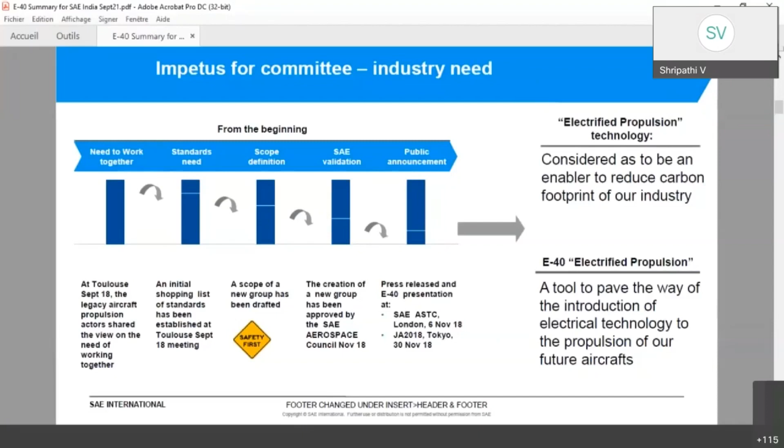Then, another point that is very important for me is the representation of the industry. So which industry is represented by the production of our standards? So we just saw that - large population, large industry. The second aspect is to be able to be legitimate when we produce standard.

We need to demonstrate that we have the skill on board on the group in order to produce, to establish the appropriate standard, so the acceptable mean of conformity, the standards that will be able to be eligible for the authority to declare them as acceptable mean of conformity.

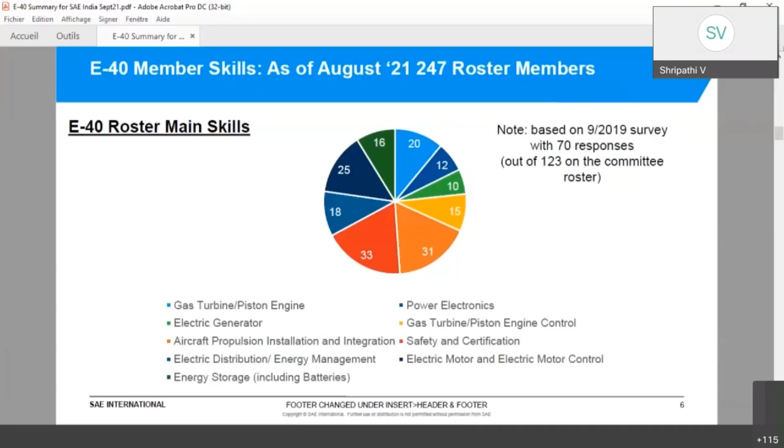So you will have the slide available, so you will be able to go in detail on it. So I will not go more in detail.

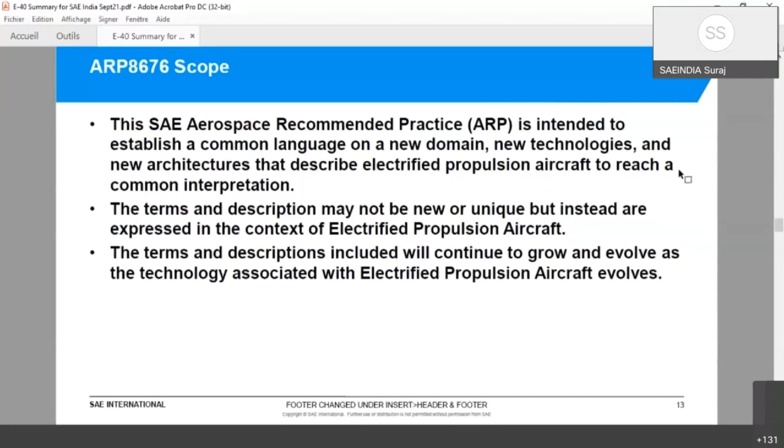In terms of status, we started the first ballot in June. The number of comments was on the order of 100. We first circulated the document in our committee and collected 300 comments. We addressed all 300 comments, updated the document, launched the ballot, and then collected about 100 comments, which we addressed by this summer.

My objective is to launch the second ballot for publication in the coming days. As I said, these documents will be updated as soon as we need to.

The second document, the one I just referred to, is closely related to 76, and we really intend to publish both documents at the same time, within a few weeks of each other.

This document is clearly an AIR, because it's not the role of our organization to recommend an architecture. It's the responsibility of each type certificate owner or company to define the best architecture for their product. So clearly not an ARP. But it was very interesting for us to describe a set of various architectures.

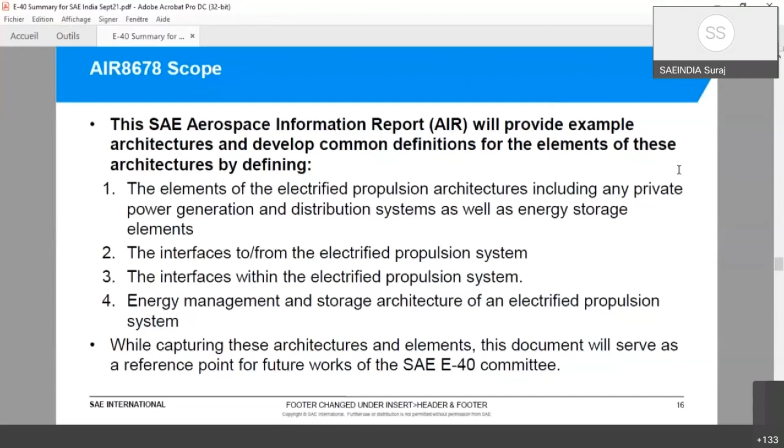In terms of development plan, a first ballot was launched in July, rejected by only one person, me, because it was clear we needed to synchronize and refine the coordination between terms. So there are very few modifications needed on both sides, 78 and 76.

I'm convinced we'll be able to launch the second ballot in the coming days in order to synchronize the publication of both documents, architecture and definition, in the same time frame, to make them available at the same time.

77, safety assessment for electrified propulsion. At the very beginning of the story, the first day that we discussed all together, it was clear that with the introduction of new architecture and new technology, the way we establish the safety dossier to demonstrate that the engine will meet the requirements.

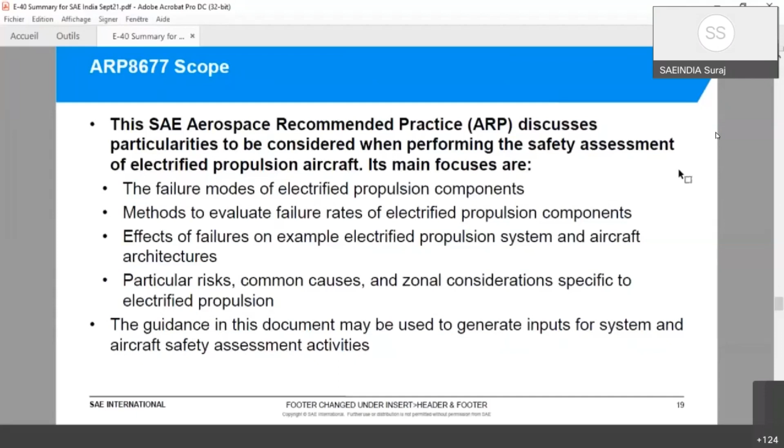In terms of schedule, it's a very complex and very ambitious document. Today, the status is to produce a draft by the end of this year, to have a first pre-ballot review at the beginning of next year, in order to be able to launch a ballot next year. It's an ambitious plan. We will see if we adhere to this.

During the activities on 7.7, it was clear that there is a topic that is important for the industry. When I say important in terms of schedule, meaning that we need it in the coming months, it's all the activities done to demonstrate compliance of the engine to endurance certification requirements. At the beginning, before we launched these new documents, our objective was to address this topic in the 77 documents.

But it was clear that the 77 documents will not be published rapidly. So then it was decided to remove this subject from the scope of 77, and we launched a specific document to address this. This document is ARP 8689. The name is Endurance Test for Aircraft Electrical Engine.

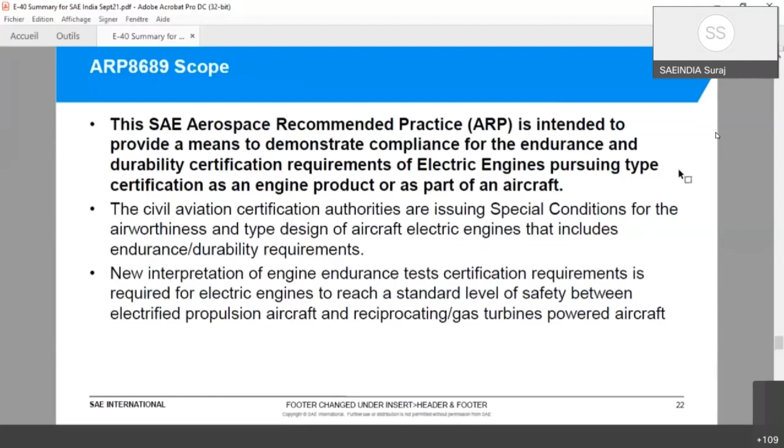With an impressive schedule, our objective is really to have a robust draft of the documents this year in order to initiate a first circulation for comments this year, in order to launch our ballot beginning of next year, in order to publish the documents next year. So it's a challenging schedule, but I'm very confident thanks to the adherence of this schedule and the engagement of people we have, and the skill. It's true for all the other groups, but I am personally impressed by this group.

So, in terms of the life of the group, our plan is, as I told you, this has been recorded, and when you hear me, I will be animating our September meeting. Our next planned face-to-face meeting...

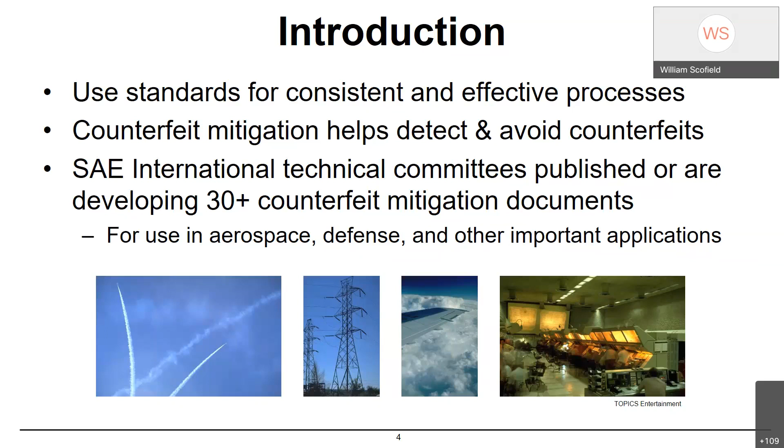So I think we kind of talked about this a little bit. The three main technical committees are the G19, G19A, and G21. Each committee has multiple documents. Per SAE rules, all committees are voluntary - you're volunteering your time. We have a lot of participation from not just industry, but also government and academia, so we get a broad swath of opinions and visions. They're all consensus standards, and we get together on a regular basis also to exchange information about where we see the counterfeit threat coming from and various ways to mitigate it.

In the G19 committee, we focus on EEE components. Jim Kryman - it's his turn to be chairman of this committee. He's doing an excellent job. As a matter of fact, I borrowed these charts from Jim. He presented them earlier at a CALCE conference back in Washington, D.C. earlier this year.

We kind of break it up into three key areas that we focus on. We have the franchise distributors - those are the distributors that are authorized by the manufacturers of the parts. Arrow and Avnet are a couple of the biggest ones, at least here in the States. We have a standard that we've written for them, AS 6496, and it has details - I think it's primarily focused on traceability and ensuring that the parts work as they work through the distribution chain, are segregated and maintained.

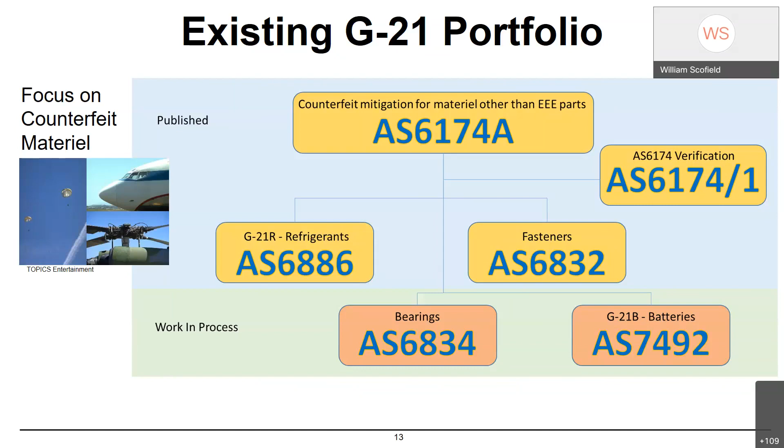Next. This covers everything other than EEE parts. It was first published about 7 years ago in 2014. This document - this committee took a little different approach than we did in 5553. It's 38 pages long, but 26 of those pages are guidance. Where in 5553 we pulled all the guidance out of the requirements document and put it into an ARP, this committee chose to leave all their guidance in the form of appendices in their base standard. It's 2 different ways of dealing with the same issue.

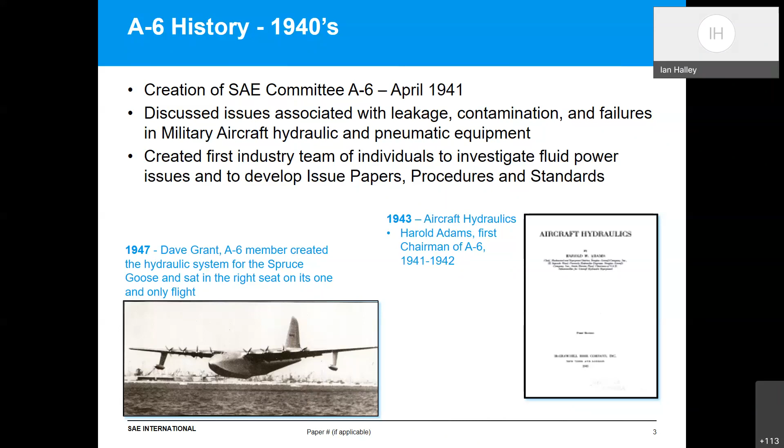The 1950s saw the increase of hydraulic system pressures from around 1,500 to 3,000 psi. They also developed the MIL-H-5606 fluid, and there was standardization of O-rings and squeeze levels, in addition to increased temperature range, filtration classifications, and levels being defined. A6 was also rescoped to include missile hydraulic and pneumatic systems.

Also of note, one of our longtime contributors, George Keller, published Aircraft Hydraulic Design, which some of you may have in your libraries, and I go to that one occasionally myself.

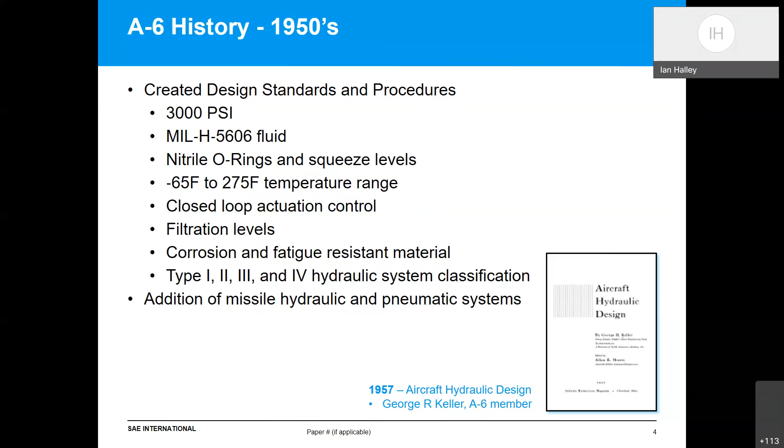In the 1960s, we started to get into variable delivery hydraulic pump development, specification, storage considerations for missiles, thrust vectoring, and then there was another restructure of the A6 committee to emphasize new technologies, including electromechanical actuation, fly-by-wire hydraulic or actuation systems, and fluidics and non-moving hydraulic components. We added marine and underwater applications and also started to look into commercial aircraft hydraulic systems.

Also of note, our longtime chairman, Bob Teree, served for a quarter of a century at this time. He's our longest running chairman and probably will be the longest ever, so we try to limit terms to about 3 years now. But he served for a total of 27 years as our chairman.

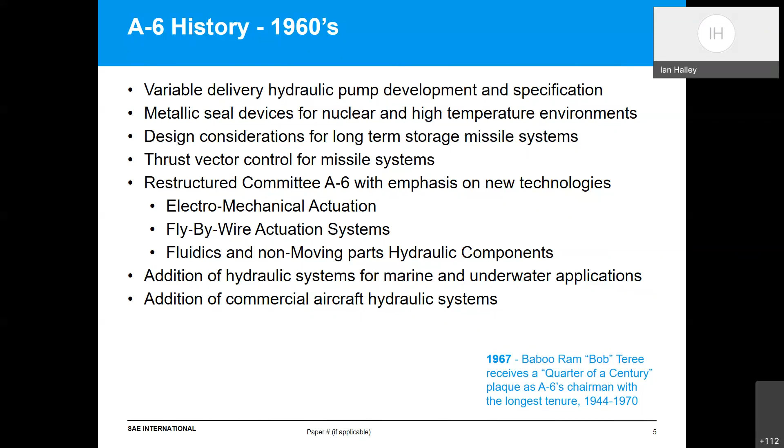The 70s saw development of the phosphate ester fluid specification for commercial aircraft. There was a lot of work with integrated actuator packages and additional hydraulic specifications for military aircraft. The U.S. Navy kicked off a study to evaluate different system pressures, focusing on 8,000 PSI. We also started to focus on flight control actuation redundancy, commercial aircraft system, and aircraft hydraulic system problems, and we aligned better with the ISO organization.

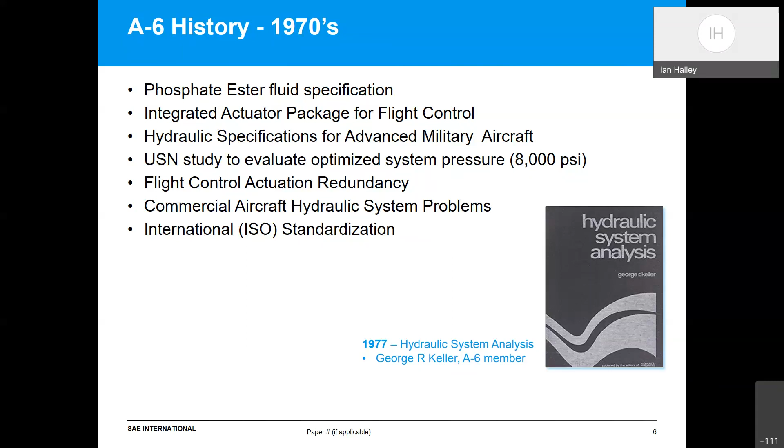Again, our longtime member George Keller published Hydraulic System Analysis, which I think is still used by quite a few engineers.

1980 saw a move to direct drive servo valves in military hydraulic actuation applications. There was a lot of work with 8,000 PSI that continued in non-flammable fluid development, and work and emphasis on lightweight hydraulic system design concepts. A6 started a lessons learned symposium, which we've continued through to this time.

A lot of the research and development on the 8,000 PSI and the lightweight or non-flammable hydraulic fluid was done by some of our members and their teams. Ed Binns, Ed Snyder and Neil Pierce were the people really leading that development at the time.

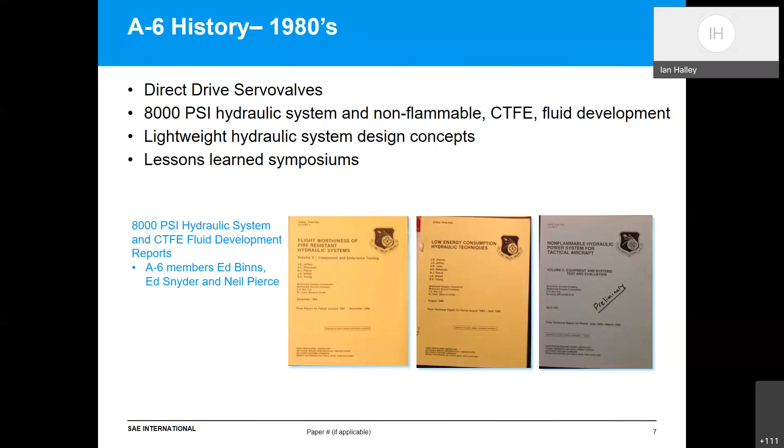So the 1990s, we had a lot of military specs that were transferred to SAE for maintenance, so we took those in. There was a big focus on seal leakage prevention, electrohydrostatic actuators started to pick up speed, and we also did some consulting with government agencies.

One of our past chairmen, Curt Chenoweth, published Flight Control Actuation, some of you may have seen. And another longtime contributor, Vernon Schmitt, published a book called Fly by Wire. So a lot of books being written by members of our committee.

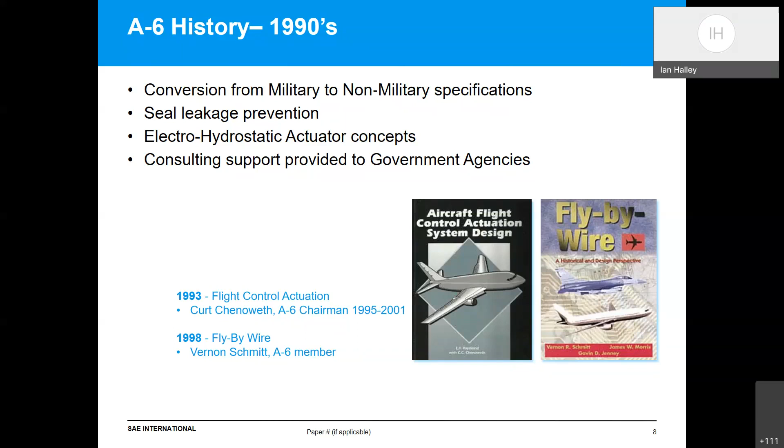So the 2000s, we started to have more emphasis on unmanned aircraft and the actuation for those aircraft, and an increase in more electric aircraft. Again, more development in electrohydrostatic actuator and electromechanical actuator documents. We also started to develop standards for pilot interfaces, such as active sticks and passive sticks and pedals.

We really committed to SAE globalization, and we held our first meeting outside of North America in Toulouse, France during the 2000s. Members of note: our second longest serving chairman, Luther Smith, was awarded the Congressional Gold Medal. Luther was a World War II hero and was a pilot with the Tuskegee Airmen. I had the pleasure of meeting him. He was a very sharp individual and sat in our meetings and provided a lot of insight into his areas of expertise.

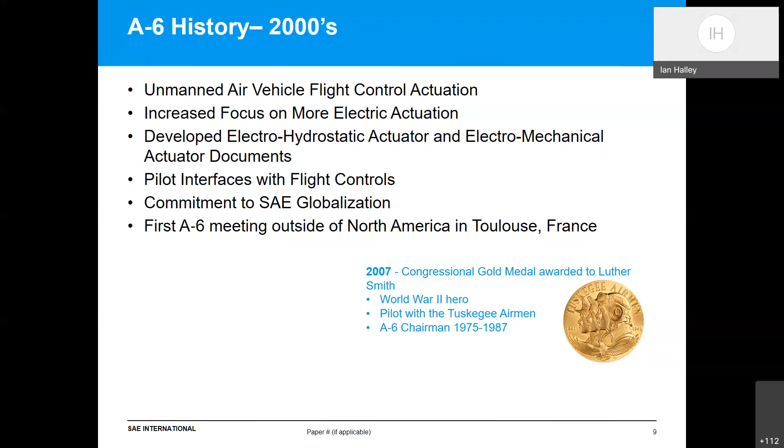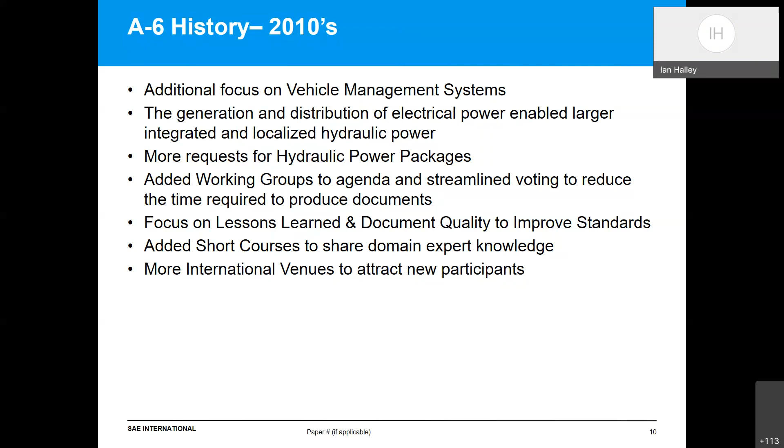Next chart, please. And just thought I'd quickly show our name evolution.

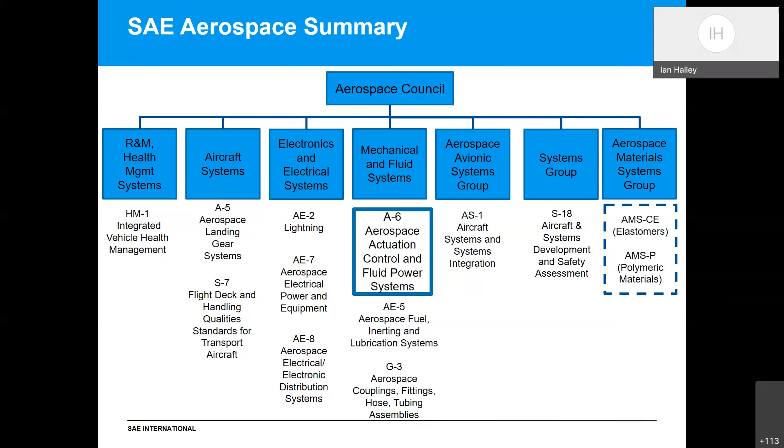So A6 is maybe organized a little differently than a lot of SAE committees, in that A6 is a committee that encompasses several committees. A6 has documents that it's responsible for. As I noted, I'm the current chair for SAE A6. I have a steering council that consists of about a half a dozen individuals that have various responsibilities to help SAE A6 function. 3 of the members of the steering council are the leaders of what we call our subcommittees.

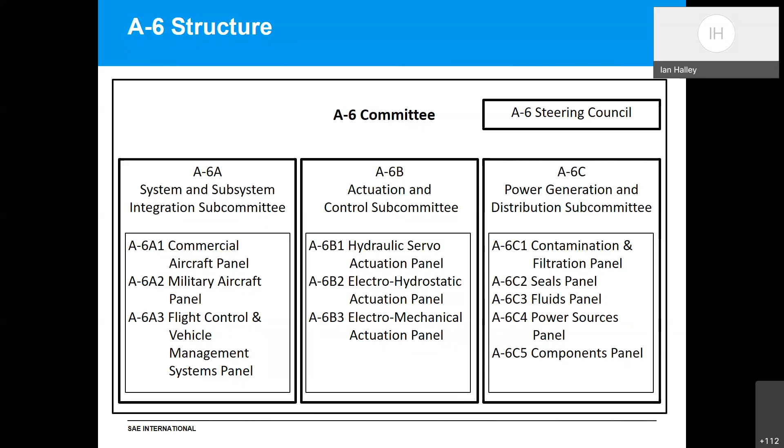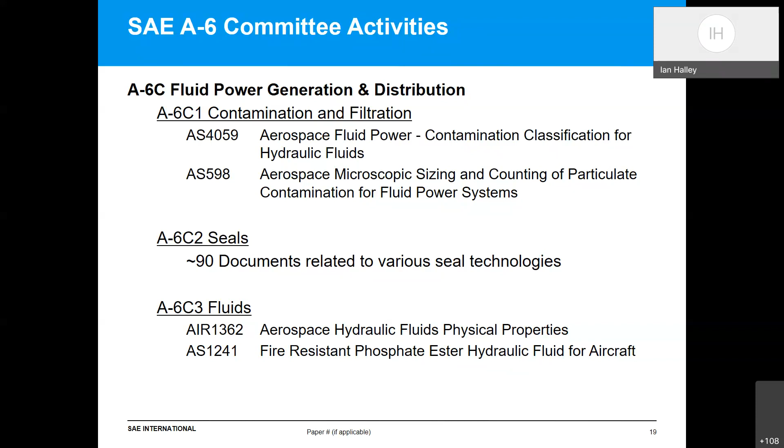So that's a quick summary of the work we do in SAE A6. We have a meeting coming up next month. It's going to be virtual, hopefully our last virtual meeting. Please join us. Any questions?